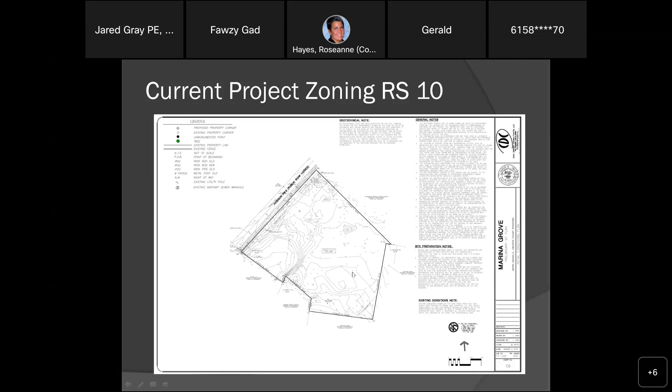I wanted to show the existing conditions, which is what you're seeing on the screen now. The current project zoning is RS10. We are in a T3 land use area, but its current zoning is residential, single family, with a 10,000 square foot minimum lot size, which is what we're allowed to do currently. You can see the project is undeveloped at this time and it is relatively flat relative to the contours.

I wanted to show our lot here. If you can see my cursor and the arrow, it's just to the north of the red block, which is the Dollar General store and the vape store, or smoke shop, and there might even be a restaurant. It is the lot immediately adjacent to it, and adjoining the lot to the north of our lot is the Resurrection Church project, which I believe is currently under construction.

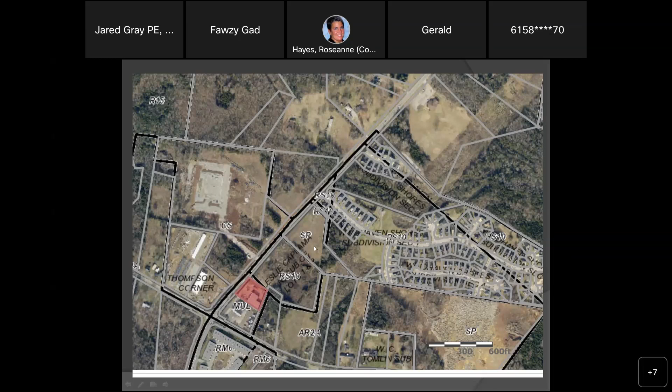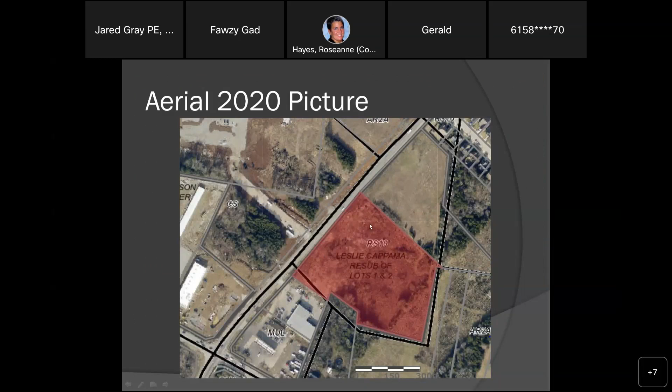Again, that's just a closer look. You can see we do have a tree row here, and a TVA line coming through as well, but it is not heavily treed. It is not fully forested or anything like that. We do have some undergrowth, but overall that is the current lot in its current state.

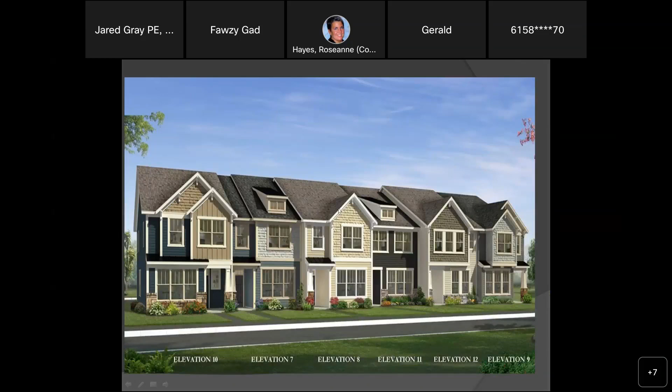From a standpoint of what we are looking at doing from single family attached, in the back, I wanted to show some representative examples. We're not necessarily completely hung up on any particular design, so I'm showing several different schematics, and I want to hear from you as to specifically what we are looking to do. There will be no vinyl siding - we would specifically use stone, hardy, brick, those type of materials, looking to build a quality product. All of these individual units would also be individually owned. We're not looking to work with a rental company or anything like that.

Specifically, we looked at doing some single family attached units that have garages. Again, I'm not a fan of these doors, but you guys might be - they would have a single car garage. These are 2-story structures, this is just an idea. We would have a dormer there more than likely at the end of the day, but again, this is a representative example.

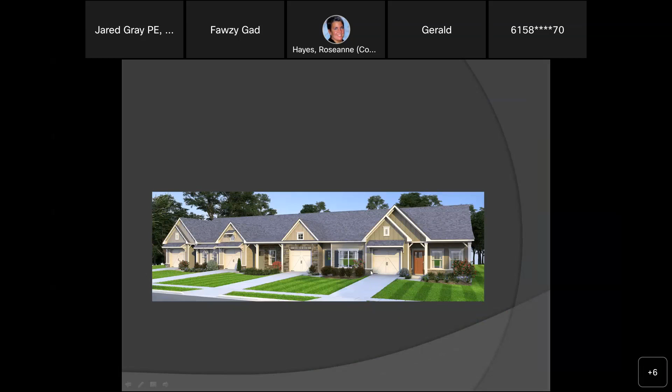This is the schematic I think that is the most favored by my clients specifically, for the single family attached scenario with the garages. You can see the garages here - these are full 2 stories with dormers. We would anticipate, obviously, the price is market driven, with prices commensurate with the individual market conditions. I would anticipate them to be upper 3s at this time.

Again, you can see the rear, the left, and the front. Obviously, we're not looking at vinyl or anything like that. This has a heavy hardy plank on the back, board and batten, and stone and shake on the front.

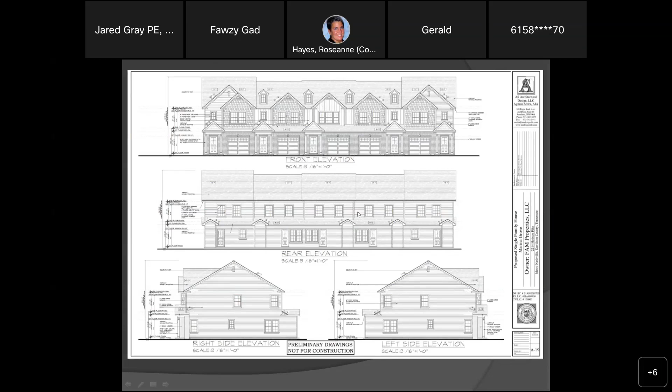In the front of our project, we do show some commercial buildings. The commercial architect that we have utilized for our concept plans is H. Michael Hindman Architects. He has done a tremendous amount of work in Cool Springs - he's probably designed Thoroughbred Square, about 80% of all the buildings there in Thoroughbred Square, Thoroughbred Village, etc. Those are all H. Michael Hindman architect buildings. So that gives you an idea of what he's done in Cool Springs, which is what he's looking to bring to this particular development in the front area.

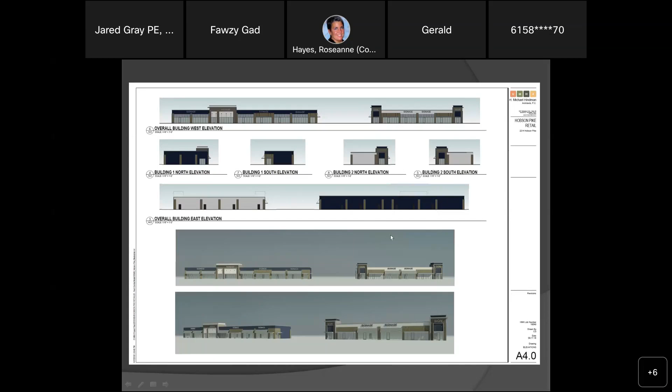So these again are conceptual, and in those specific areas you can see what we're looking at with respect to utilizing rock, hardy, etc.

Now, relative to traffic on Hobson Pike, we have preliminarily looked at the traffic level of service, and our development is designed in such a way that it would not overly impact the level of service for Hobson Pike. We would continue to look at traffic impacts throughout. If there is a desire to introduce a turning lane or something based upon our overall numbers, then obviously we will have to do that.

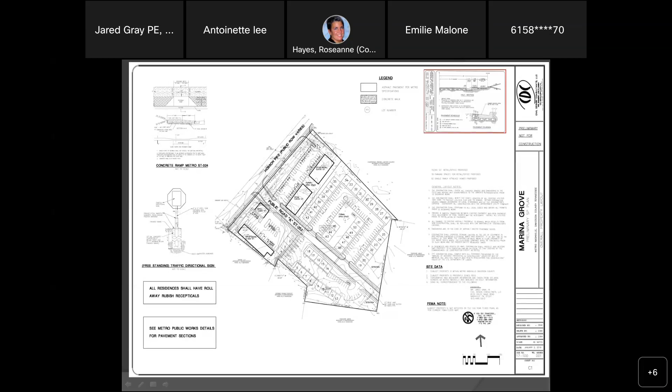Well, to answer your question directly, we thought it would be welcomed and honestly sorely needed for that area. This particular plan, and the fact that we are a T3 NC, or neighborhood commercial, for just this front section, allows for retail. There are no real opportunities for a small business owner, a dentist, an emergency care clinic, a coffee shop, etc., specifically in this area. And that is something we felt like we could definitely help with on this parcel.

It makes sense from our standpoint, being surrounded by churches. We have a church directly across from us. Again, it's something we saw a need in the community for, and wanted to help with that.

Hello? Yes, I can hear you, John. Great. I was so glad that we do have an actual neighbor on the call, because I'm not seeing much in the way of community participation. I don't know whether that's because we're still having difficulty promoting these meetings or what's going on. But since it is being recorded, I'd like to go on record to explain to that nice neighbor on this call tonight how this came about.

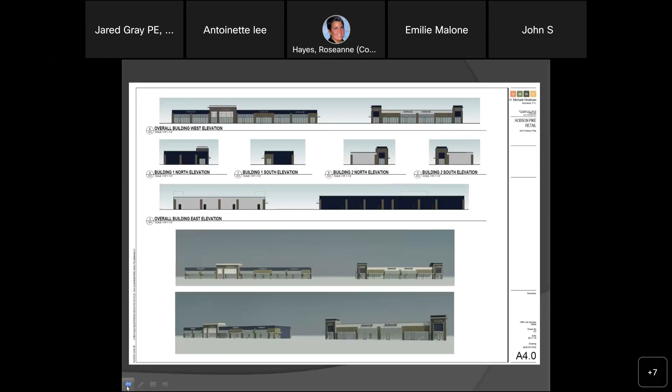Does anyone want to see a specific slide again? Of the representative elevations, which one is favored among those on the call tonight? Can you show the elevations again, please? You should see, oh, this is one elevation. I'm sorry, can you see them?

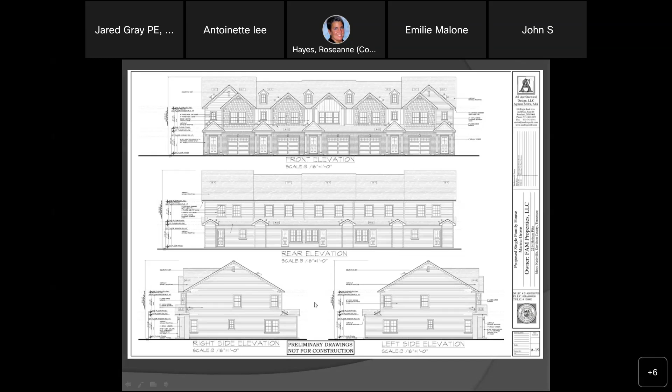I hope you can see my cursor moving there. And obviously here, each one of these are garages. Also, another important thing, we have designed this so that we would be able to park a vehicle outside of the garage, and that vehicle not be hanging over the sidewalk, because if their garage is like my garage, it fills up with stuff and people don't park in them many times. So we do take that into account whenever we look at a design, and we would be doing that in this particular case.

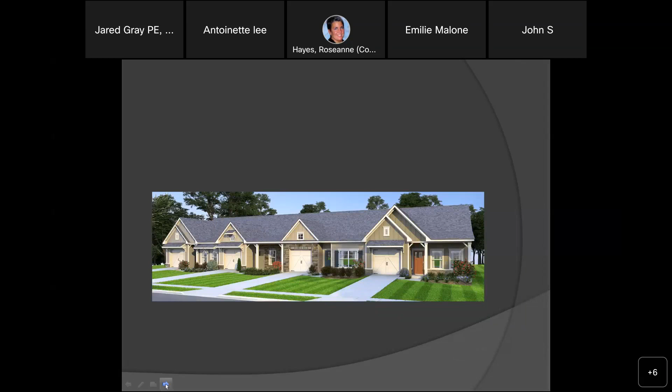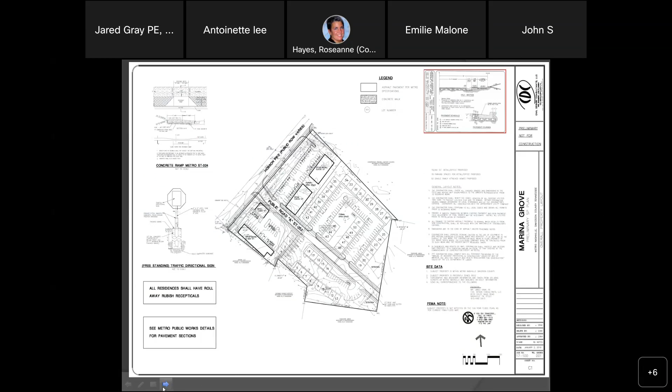Just to let you know, this will not be the last meeting on this. There will be another one. You all should have all of the information here. If you have some questions...

Send them back to that address where you received the notice of the meeting. Ms. Roseanne will put them together and then I can see what they are. Or you can just email them to me and I will put them together and we will look at those and see what type of things you have. I do understand that I'm cutting this meeting off just a little shorter because of another important meeting going on at Cane Ridge Community Center.

And if you are in that area, I would hope that you would go ahead and attend that meeting because it is a very important meeting, a cemetery survey, and it will give you a lot of good knowledge about things.

There will be no community meetings in July so that we'll have time to put this information together. Does anybody else who had not made a comment need to say something? I believe Jared's email and information is also out in the chat room.